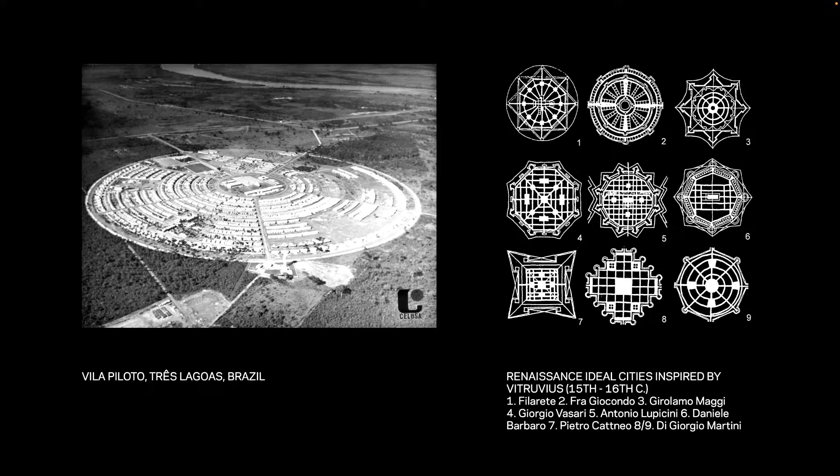Which is we're very reluctant to think about utopian visions. They're often singular, they don't adjust, they don't accommodate. We'd much rather think of architecture as a network, an ability to accommodate different climates, different conditions, whether they're social, cultural, or environmental. Kind of an architecture that, in effect, is much more elastic. So that, I think, was a provocation.

After talking about this for a number of years, we were challenged by some of our colleagues to go ahead and make a book, which in itself is probably harder than making a building. So we'll only do that every once in a while. But that also brought into sharp focus the idea that there are precedents, case studies that are multidisciplinary that address social, cultural, and environmental issues that for us have been touchstones.

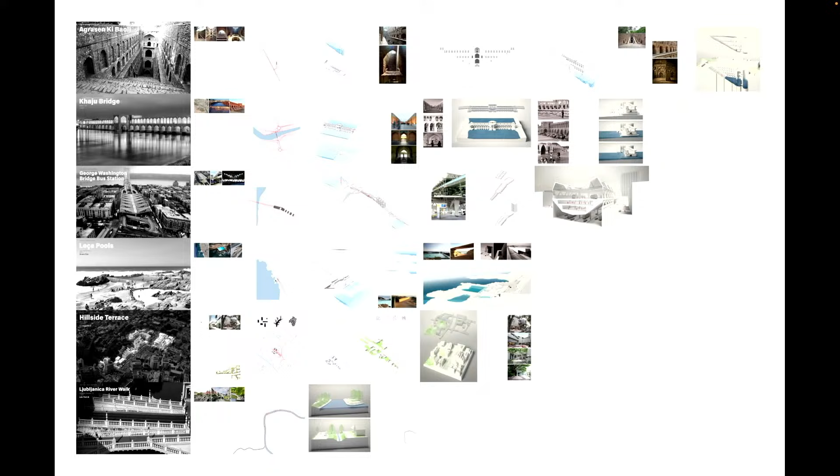Instrumental in providing a level of inspiration. So we did a kind of catalog of projects that fit in this in-between world of architecture, infrastructure, and landscape, and thought that we would really take a much deeper dive.

So we're not going to go through the whole book. It's available out in the lobby, but I think we wanted to use this as a way of thinking about how we can find a sort of intellectual mentorship through looking at other projects like Indian stepwells, which are extraordinary pieces of architecture, but operate both socially and infrastructurally. And they have great lessons about climate to teach us.

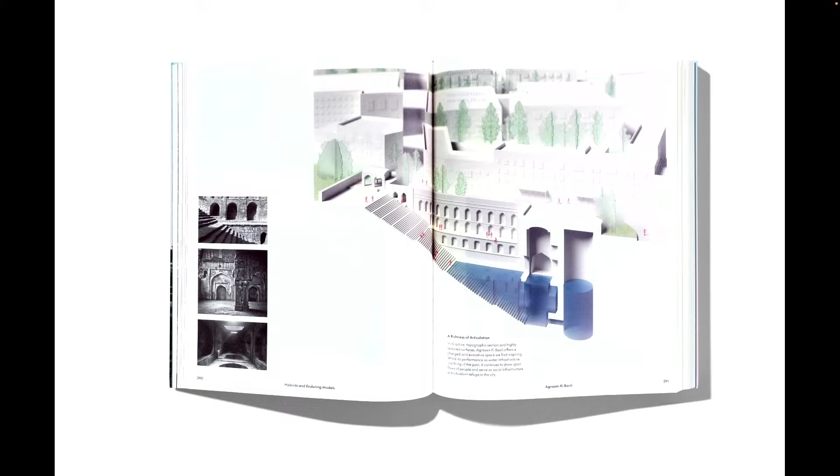So we did, I think, a very robust idea of documenting these in our office as, in a way, an homage to, and perhaps an act of love toward what great architecture can do. And what great architecture can do is it endures in ways that change over time.

And so for us, we've had a massive crush on the Spanish Steps. Michael grew up in Rome and had a chance to experience the fact that it's a social condenser as it operates to create this sectional urban space and place of movement that is incredibly inefficient and beautiful because of its inefficiency. As we started to build these models in our office and unpack them, it was so interesting to look at both the figure of the steps and the figure that it opens to of the plaza below.

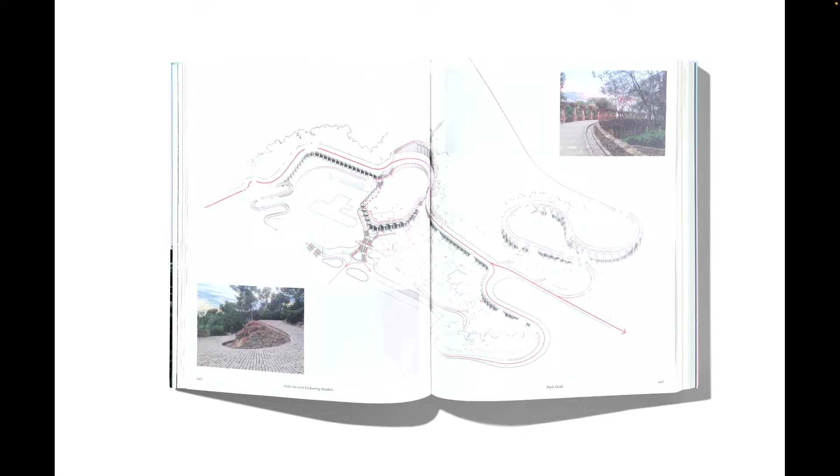And again, as we start to think about reaching out and sprawling a little further to do something incredible, certainly Gaudi's Park Güell is an icon for us. It begins with symmetry, but drifts out to have this infrastructural narrative that becomes rough-hewn in the very way it's made. But as you look at it, it does something that nobody seems to know about, which is at the very top, these columns collect water, and as they collect water into this market-style space, it's actually organized into a cistern. So in many ways, it was preternaturally aware of environmental systems that we are taking very seriously now.

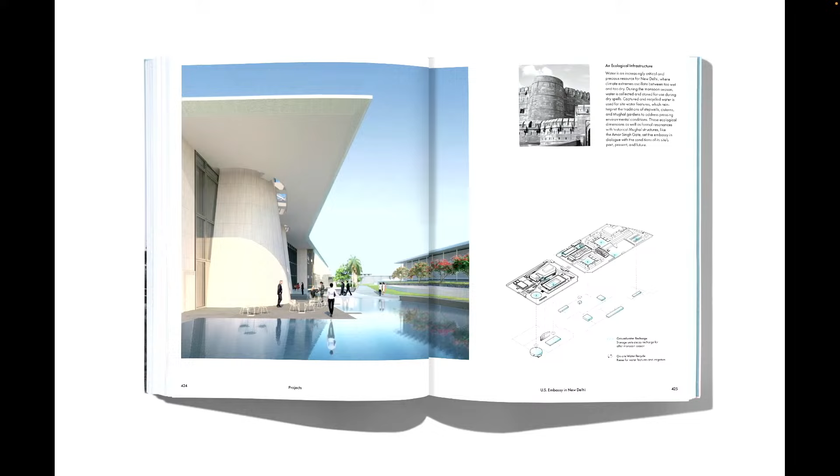We'll share our project for the US Embassy in India. But in that case, you'll see that this narrative of water and of layers and of systems and shade we have really experienced the value of, here today especially, are elements that are enduring as well.

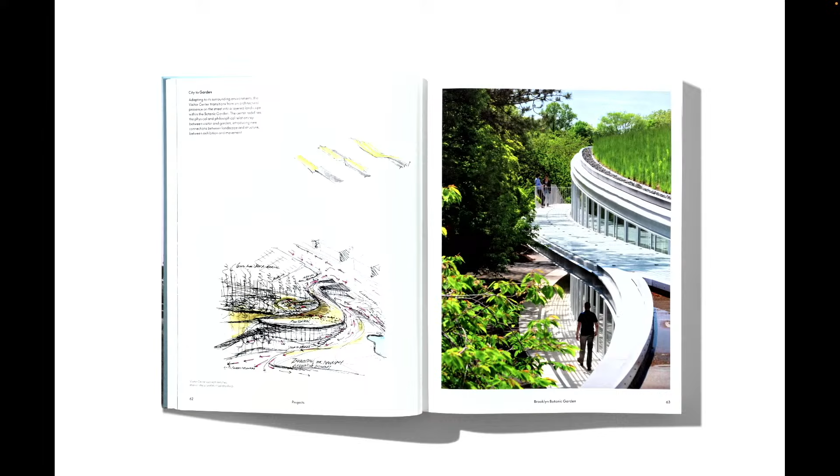And we'll also talk about the Olympic Sculpture Park, of literally constructing sites that may not be there rather than reacting, actually inventing. And again, we'll talk about the Brooklyn Botanic Garden, but again, this whole idea of topography and inhabiting topographies and delaying that sense of arrival to actually experiencing something far more amazing. We'll be able to reveal things by our super aggressive, scratchy, thinking-out-loud drawings to some of the ones that are more precise and more delicate.

We also thought we'd show a few projects that are very current, but also share some projects that have been around for a while, because we often forget that projects have a life beyond opening day.

Some of you might know this project. This is the visitor center for the Brooklyn Botanic Garden, a 52-acre tiny botanic garden in the middle of New York City, an incredible oasis.

This is what the entry used to be. You'd have to queue up and go through this narrow slot. We thought, rather than think of it purely as a building, let's think of it as a gradient between city and garden.

These little origami studies take that idea and start to spatialize it, or at least construct it in ways that might give us cues as to how architecture should operate.

The building is overtly architectural as it fronts Washington Avenue, a very important street in Brooklyn, and then slides or slaloms into the garden and becomes more overtly a piece of landscape.

We'll talk a little about architecture's capacity to reinvent movement, which is one of the things architecture can do that the other arts can't do in the same way.

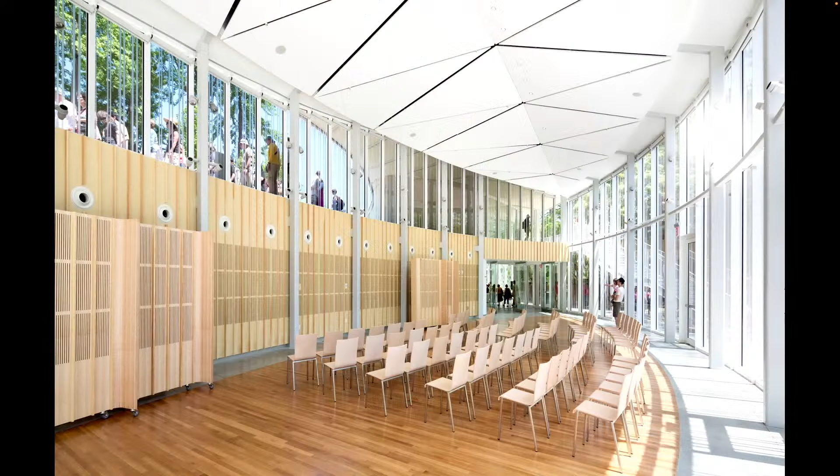There are moments where this becomes a kind of community room, a two-sided room, which we thought would be an interesting way of exploring the geometries of this particular building. At night, or even in December, it becomes a kind of lantern.

As Michael described, there are some very interesting things obvious when you look at it, which is there's a green roof. But there are many agendas here in terms of the garden's commitment to sustainability and demonstrating it.

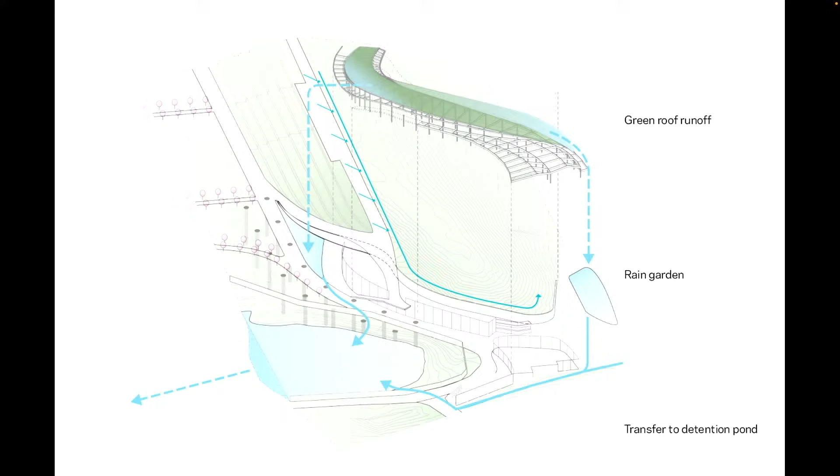The green roof collects the water runoff. We have a series of rain gardens. We have a distributed geothermal set of wells. So every element of water is harvested and somehow brought to the irrigation of both our 10,000 square foot green roof, part of the exhibition if you will, and to the garden itself.

We love this image because it's basically saying that you can be 100% landscape and 100% architecture all at once, giving you an abstraction of what 200% might be.

Yet there are times where as much as we like form, and we'll chase it down to the end of the world, every now and again we like our architecture to disappear. It does so here within the garden at that moment where it's fully embedded within this 20-foot hillside.

In that lifting or lofting, you can actually see the whole idea of the topography being inhabited and peeled open, and what Michael shared as that event space you can see again here on the oblique. We were hoping to be completely urban and architectural at the urban edge, but become 100% natural at the other edge.

However, the site that had originally been planned, which was dead center in the garden, which we suggested should be moved to the city edge, remained a remnant. So we worked together with the garden to get a grant to basically keep them from the lawsuit that was lurking on the edges for ADA accessibility. This had been what had been proposed to make this accessible and skip the whole discussion.

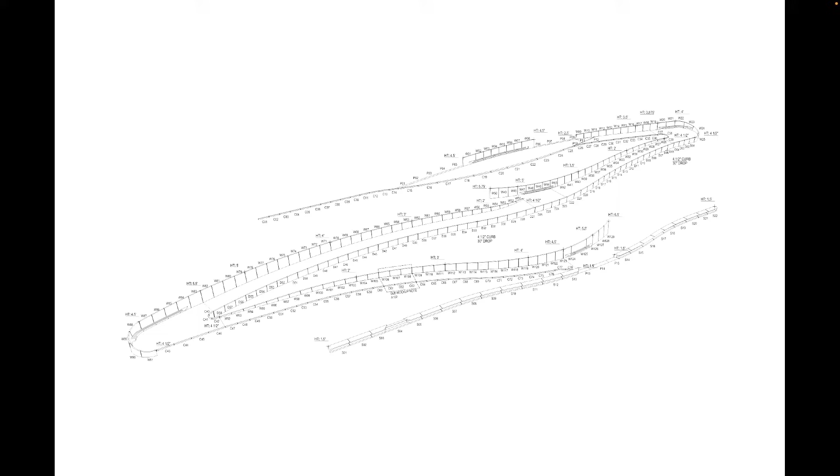Our question was, well, maybe this could become a new garden. And over 1,200 linear feet, we could actually create something that would be a journey or a new garden from the subway and actually allow both ends to connect. By using mass customization of these precast walls, we were able to actually build and construct this site.

This was done to handle the incredibly steep runoff and washout that was happening, and also manage it now with a garden that's really like no other, with crepe myrtle groves within other natural habitats, working with Toby Jones, a horticulturalist, to get this journey to be something that felt completely natural.

You'll see in this very brief film the fact that it changes over the season, and you'll notice that the roof is entirely red. In the fall, we love that it changes colors. We love that it doesn't look like an ADA ramp at all, but looks like a journey or kind of a wandering landscape. We're thrilled that people are doing dances and actually recording space on that journey.

But mostly it's about being part of the city again, part of the garden, and saying that these are, in fact, married together. So this question of what happens when things are married together is probably what they asked for you, was the Tsai Center for Innovative Thinking at Yale University.

We were asked to do an addition to Marcel Breuer's Becton building, which you can see back there on the side. And as you look at it, this is the roof of one floor of the labs, and it's really the engineering area on campus.

We said we're not going to touch that masterpiece. We're going to do something altogether different. We, in fact, said if we could create something, since it's a place of innovative thinking, that would almost draw like a light bulb, a sense that something else is happening here.

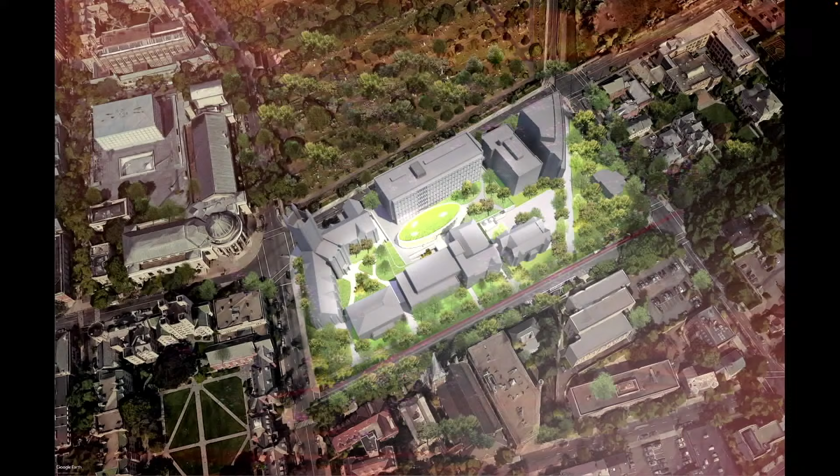We started to think about the one moment we would mess with Marcel Breuer was his barrier wall from the academic quad here by the president's office and up to the roof. If we could eliminate it and create a new landscape, we could create this new prospect for this very petite 12,000 square foot curved glass lantern, which is where collaboration and convening and entrepreneurs are gathering.

We were thrilled with the glass fabricators in China who were able to create both flatness and curvature so that we didn't need columns all the way throughout the mullions, because a 22-foot span is structurally stable with its curvature. And you can start to see that really it's a place of convening.

This is the moment when it just opened before they've really started to work it. But you can start to see that it also has a chance to be changing. These are the curtains that are actually automatically drawn when the light is strong or when they want privacy, with a clerestory at the base. Again, breakout spaces are acoustically independent but visually connected to what's happening here.

But I think the thing that we're most excited and most proud of is that the question was, how could you make the collegiate Gothic world of Yale and that brutalist world of Marcel Breuer look as if they were married?

And finally, on the left, you can see that marriage of those two languages. And of course, it is a lantern at night, and it truly has become a draw. It is really one of the most well-used spaces and one of the tiniest spaces on Yale's campus.

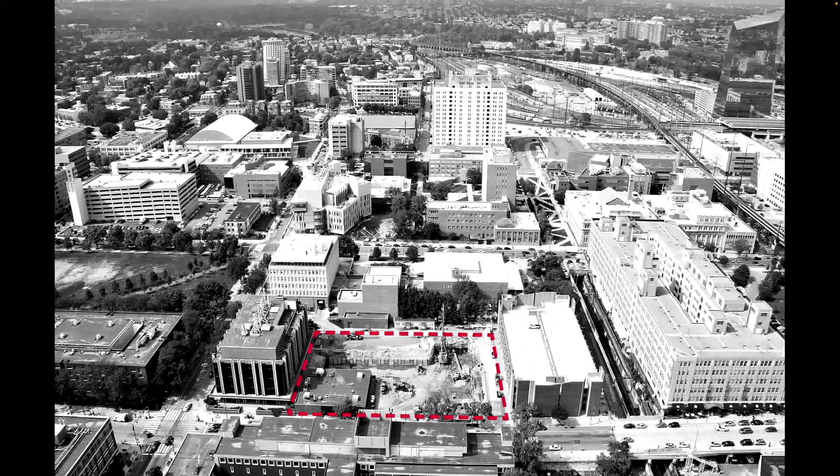So what to do? We peeled back and decided we'd take a much broader look and understand this particular site as a sort of threshold between the city of Philadelphia and the campus, that these two worlds are starting to increasingly become merged and talk to each other.

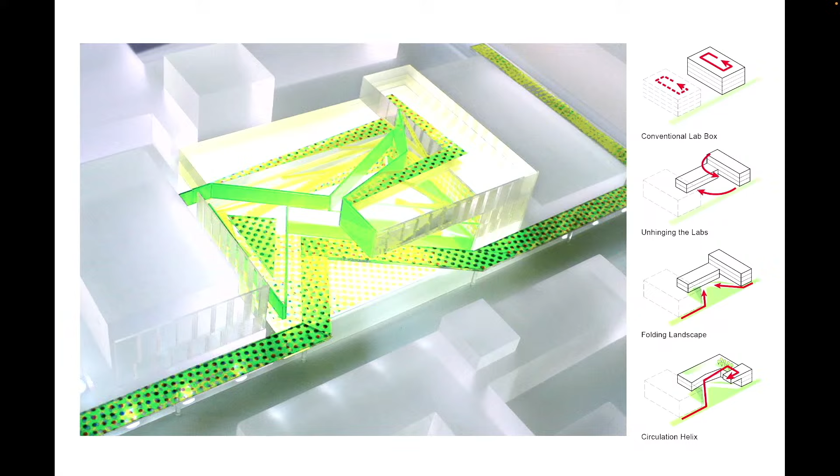We also love the syncopation of the very beautiful Penn plan for Philadelphia, a combination of open spaces and buildings. So we thought, rather than just think of this as a building, let's think of this as making a mini quad. If we could take the lab building, push it back, and wrap some of the programs in a kind of Mobius, we could create a three-dimensional quad, which is the hallmark of a traditional campus like Penn.

But it's also an opportunity to take these different worlds and think of them sectionally. It's a tight site, so how do you move through a building that avoids the problems of balkanization by floor? This was a photo taken just when the building opened, and the trees now have come into their full maturity.

And you can also see the serendipitous discovery that the dean had of finding a Tony Smith sculpture hidden away in the university archives. So I would encourage every dean we talk to to look at the university archives, because who knows, it could be an extraordinary sculpture. This green lawn is also a giant cistern, and we'll talk about the importance of managing water.

It's interesting not only because of the cantilever, but the more challenging aspects are the lateral loads. So there's a structural challenge that comes with the simple idea of making a Mobius, and like many architects, you do a quick scheme, and then you go, oh my God, how are we going to do this? In this case, we were privileged to work with an incredible engineer, Severud Associates.

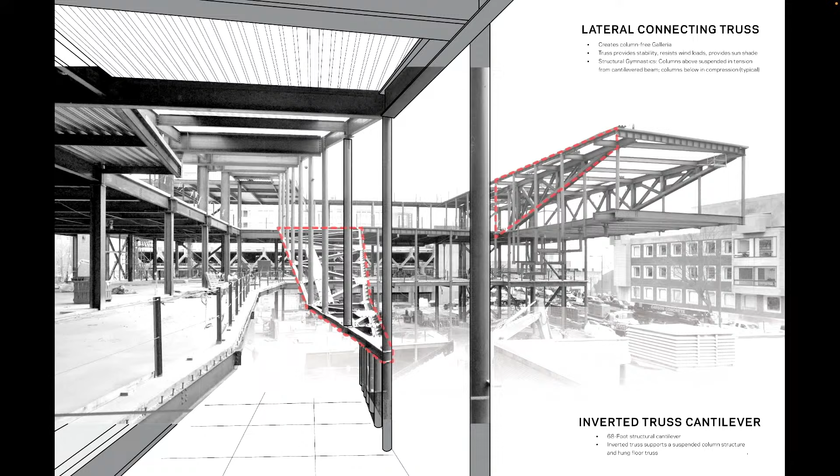You can start to see how this three-level space plays out, and how these different layers cantilever out without the necessity for columns. They're actually hung from the roof, and the lateral loads are held by this triangular diaphragm action, this kind of truss. That allowed us to create a very tall space, in effect, a porch to the building itself.

You may wonder about what's up with the yellow glass. If you've ever been in a clean room, the walls are very solid, but the doors have a yellow portal, because you need to stop the ultraviolet light, and that's what controls it. As we were visiting clean rooms with our client, we said, what's up with that? Nobody can see anything in - could the amber glass actually be comprehensively the facade of this clean room, so everybody could see in and out? Nobody had done it before, but we did research and found out that you could. So you can start to see the folks in the very clean environment are in the bunny suits.

By contrast, the microscopy characterization suites needed to be away from vibration and EMI, electromagnetic interference. So they're down on the lower level where things are most stable, but we're drawing the hillside down so they can get natural light as well.

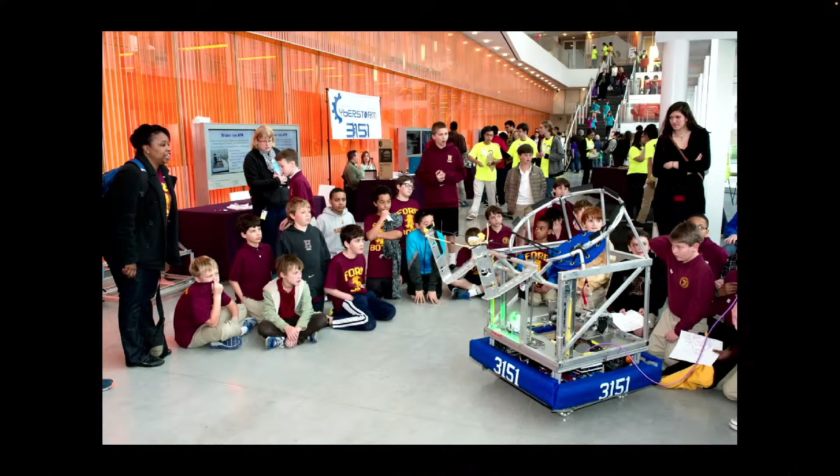But the most important thing in many ways for the university about making everything visible is that this is the most hidden part of their research. They really want to encourage and welcome the pipeline of future engineers, so they regularly host hackathons in this space to encourage this use of thinking. As Michael mentioned, this question of seeing and being seen is something that these stairs enable, allowing people to actually socialize.

Dean Eduardo Glandt had said, because the elevators have to be so remote to avoid the vibration and the electromagnetic interference, we have to make the most irresistible stair. So we did, but carefully put power there so people actually get their laptops on those intermediate landings. These are 20-foot floor to floor, effectively two stories for every floor.

But it's the whole idea of seeing what's going on and feeling like you're part of a community, including at the very, very top, the Glandt Forum, which in many ways has a chance to look out over the university and becomes an emblem of invitation as it hovers up in that origami that Michael described.

And as you start to look at it, really, in some ways it's kind of amazing at night because it changes its personality altogether and becomes an emblem of illumination within the engineering community.

So again, this is really looking at it as a building in motion. We talk about drift, but what we hope for is that the community of collaborators and scientists and engineers who are in here are more predisposed to drift and discover new things.

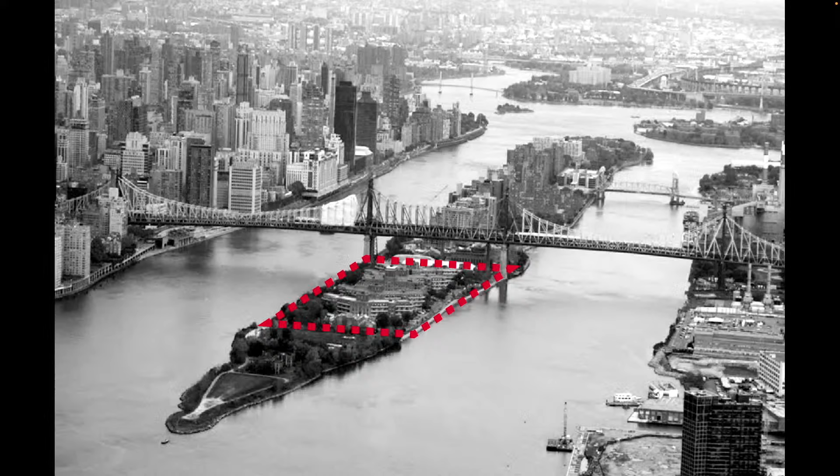So if we go to another part of engineering and science, we think about the invention of a whole university setting: Cornell Tech, the Technion in Israel, Cornell finding a place on Roosevelt Island, in effect, to really advance the connections between entrepreneurial invention and the research community.

So you can see there's a very strange thing on this island, a rather amazing island subject to flooding. You all might know about Hurricane Sandy, but with amazing views.

And when we were given the site for what is now the Tata Innovation Center, the bridge, it was really having half of it for startups and half of it for the academy.

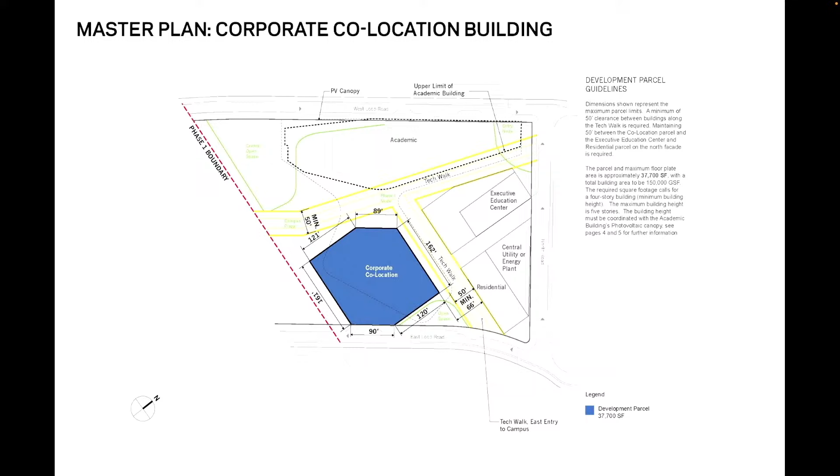They gave us this really weird site and told us to put an atrium in the middle. And we said, do you have any idea where we are? We're on Roosevelt Island. We are literally in the Île de la Cité in New York.

We could have river-to-river views, but we could also split the building in pairs so the entrepreneurs and the academics actually have a chance to convene around maybe the Spanish Steps, who knows.

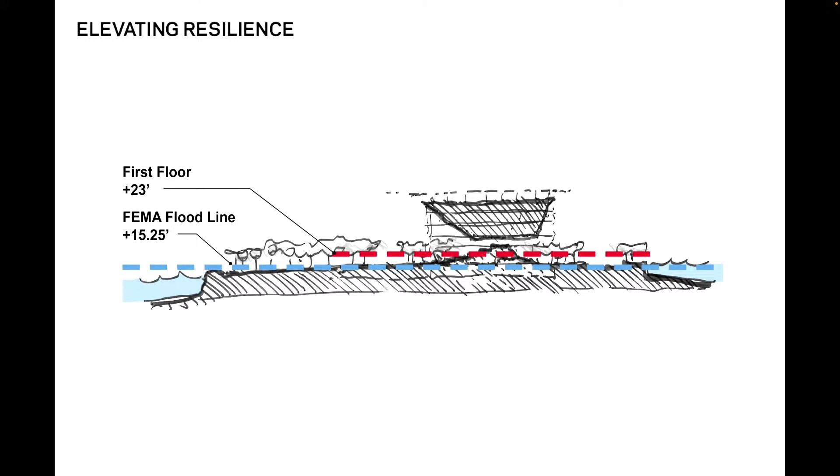But if you start to think about that, the whole idea of flood resilience meant that we raised up all the critical infrastructure, all the classrooms, brought everything up, and in effect, again, started to look at that topography of collaboration through the world's most inefficient circulation, but ideally the most efficient place to catalyze conversations.

You can see we're in dialogue with the Bloomberg Center on the right by Thom Mayne, our building there on the left, but the most important thing we did was literally elevate the corners so that rather than blocking all the views of the river and of the cities in two directions, we elevated it.

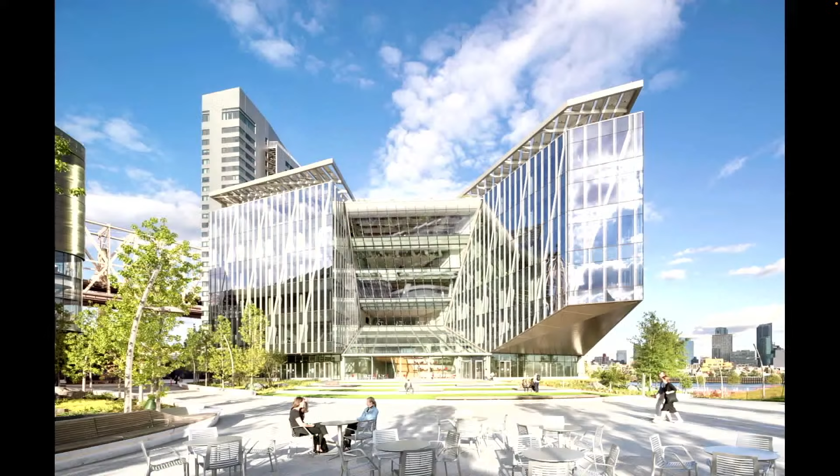And elevated it and actually split apart and made this connection with the landscape to say that we are finally open out on the central green that's been invented, and that you can actually start to understand a place of invitation. So many buildings have four corners.

We thought it actually would be great to make this much more fractal, so it actually has 8 corners, which gives, I think, in a way, natural light to what would otherwise be a very, very deep floor plate.

Marion talked about the areas of convening that are more public, and those are in the center that you see that capitalize on these extraordinary views.

But it's also an opportunity, and this is a truly public space. It's actually mandated in Cornell's charter with New York City. So it is, in a way, our homage to the Spanish Steps, a kind of place where you can, in a way, linger or move through.

And the idea of moving through a tall building, in this case it's not very tall, it's six floors, I think that kind of choreography is, I think, a lesson that is extremely important to us, a sense of a promenade or choreography. So you can move up to that kind of piano nobile that is, again, protected from rising sea levels, up through another stair.

You can enter a studio that, in turn, also is double height. And this particular corner here has become an incredibly popular spot. And you can start to see that students gather, they move furniture around in ways that we never anticipated.

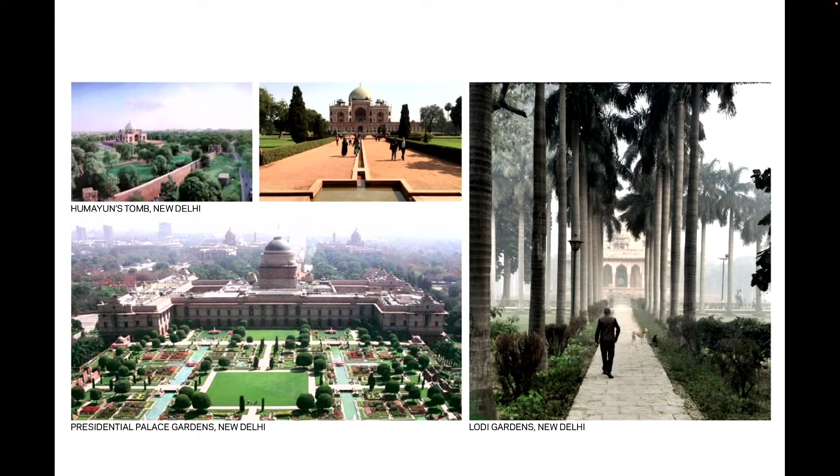And we came onto the project also very excited and inspired by the tradition of Mughal architecture and Mughal gardens, where water is treated as a very precious resource. There's a sense of balance between what's inside and outside. The geometry of the garden corresponds precisely with the geometry of the building.

Then there's also the history of using local stone to create these amazing fortifications. And we know Le Corbusier was greatly influenced in his great work at Chandigarh by the Agra Fort. If you see these giant drums, you can start to appreciate that.

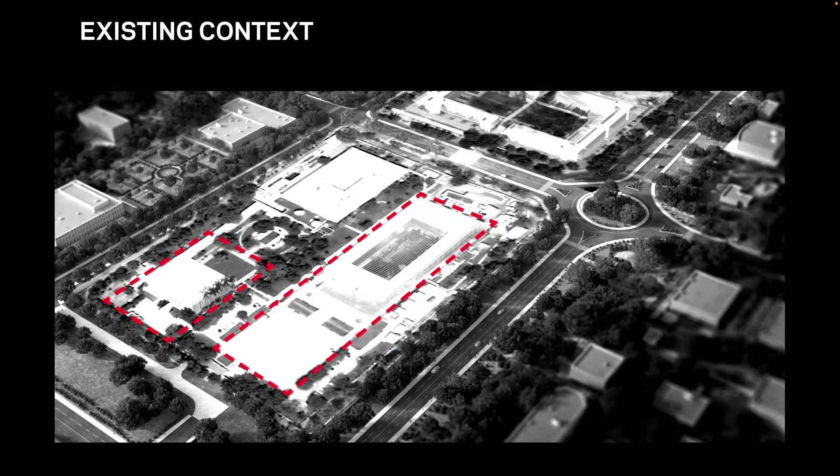So our goal was to, in a way, save and ultimately restore these 2 buildings outlined in red, the Chancery and the smaller but very beautiful Ambassador's Residence, and to reconfigure a plan for this very large embassy complex to grow over time.

So rather than think about the buildings, we thought about using a linear path to connect both new and existing buildings. It's a linear garden - the French would call this, in the Beaux-Arts tradition, a tapis vert, a green carpet that is, in a way, the driver, again thinking about the importance of Mughal architecture and gardens.

And that green carpet in turn allows us to decentralize the idea of capturing water, again building on the tradition we talked about earlier - Indian wells, which in a way anticipated how important water is.

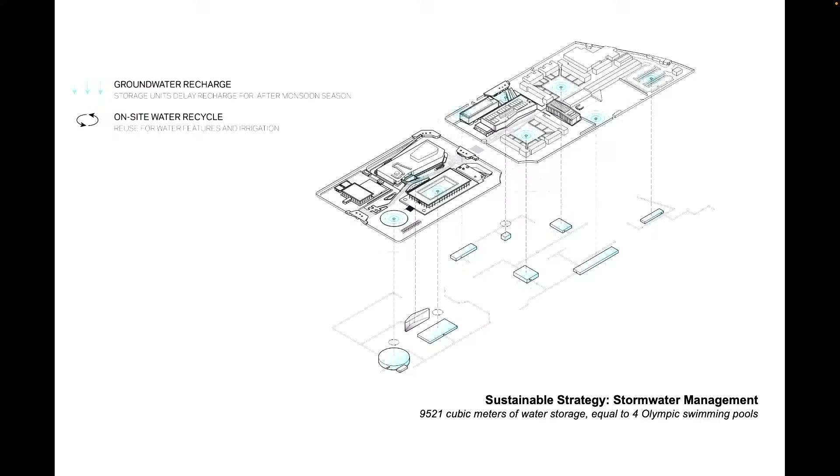So we're developing a system to capture water and keep it during the dry period. Ultimately, there'll be 2 significant buildings and a collection of smaller buildings on this site.

So we'll just go through an animation that, in a way, talks about how this project evolves conceptually - the idea of developing the promenade and connections with 2 entry gates.

The idea of then thinking about a series of sunken gardens that would allow us to put program, about 70,000 square feet of program, below grade, where it's cooler, lit through a series of courtyards and landscaped ground planes.

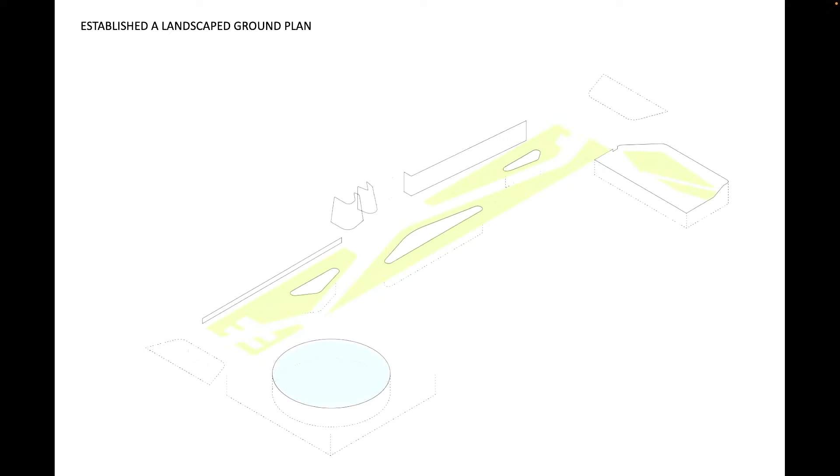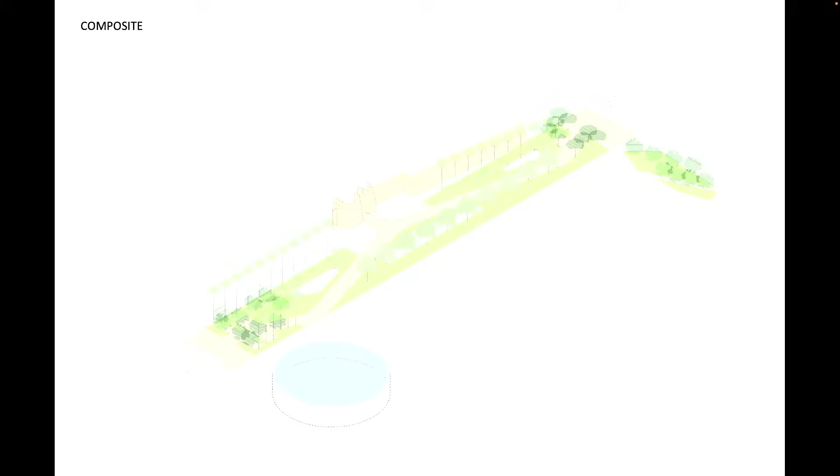And then there's a rather robust program to plant trees to provide shade, native trees. India has a number of beautiful jacaranda trees, Delonix trees. And then here you can start to see, it's a little faded, but the composite - this becomes the kind of armature against which a series of architectural elements play off.

Similarly, in India, the idea of walls moving from a very public condition to a very private condition is not pejorative - they're very important to the tradition of Indian architecture. So we want to respect that with a kind of entry area.

And then a shaded garden where you can wait and get your visas, which is a very, I think, often underappreciated, important aspect of embassies, and very stressful. So we wanted to make a very beautiful garden.

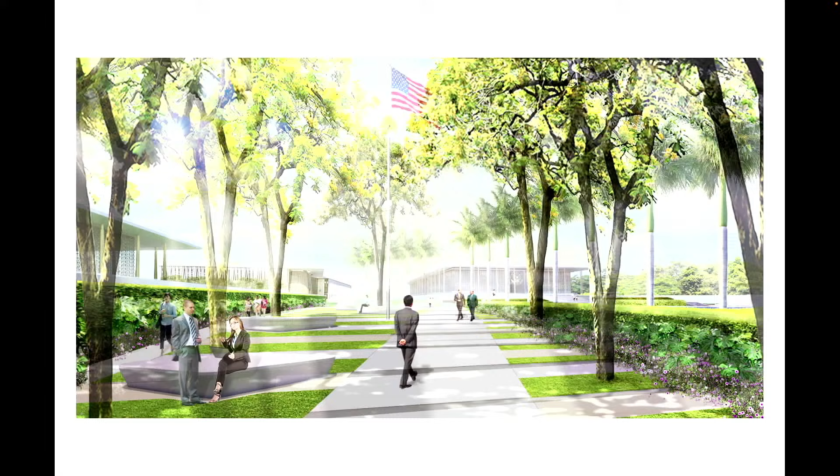That, in turn, allows us to create, you can start to see at the lower level, a series of sunken courtyards. And then that allows the complete assembly of these two buildings, the building on the right being the Edward Durell Stone building. The building on the left is our homage to that, and a new, fairly significant chancery.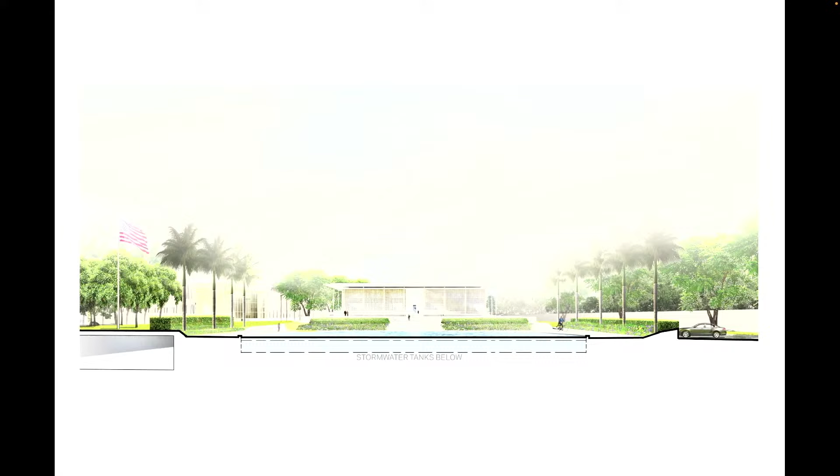In fact, under construction right now is the equivalent of an Olympic-sized pool excavation that is there on site, which will be the source for water collection.

As we come over to our building here, what we started to look at is something that you all are probably highly conscious of, which is outdoor cooling. So in addition to the shade, we have a skim of water here upon the arrival of the building that offers its own outdoor evaporative cooling environment in the shade.

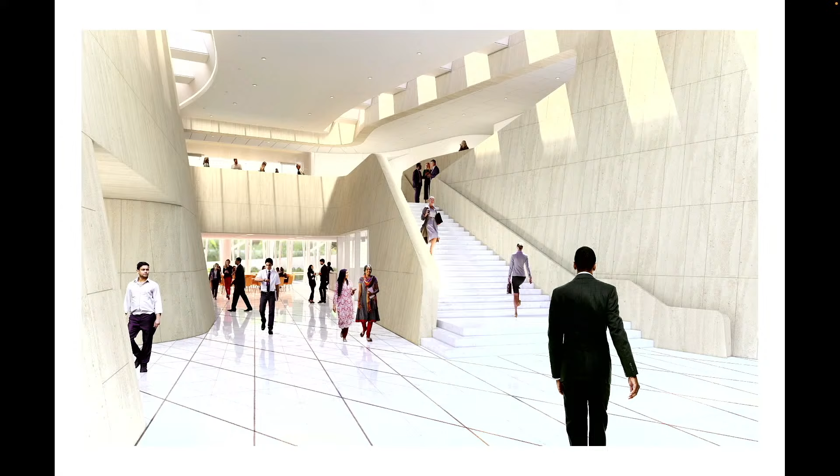And again, it brings you into this lobby here, which is really a gallery space. You can see where people gather for meals is right in the back. This is a convening area that has less security obligations than some of the interior spaces and the offices. But as we were talking about that, it's really ultimately setting up the situation where the Chancery building and our new building could be connected through these lower level courtyards and spaces.

And you can start to see the consular flow on the other side. Again, as Michael mentioned, the Delonix trees, the jacarandas, the whole ensemble of the landscape has informed every part of it. But so too is the robust influence for us, and you can see in our charcoal drawings, of these kind of drums and walls that have really been so powerful and enduring.

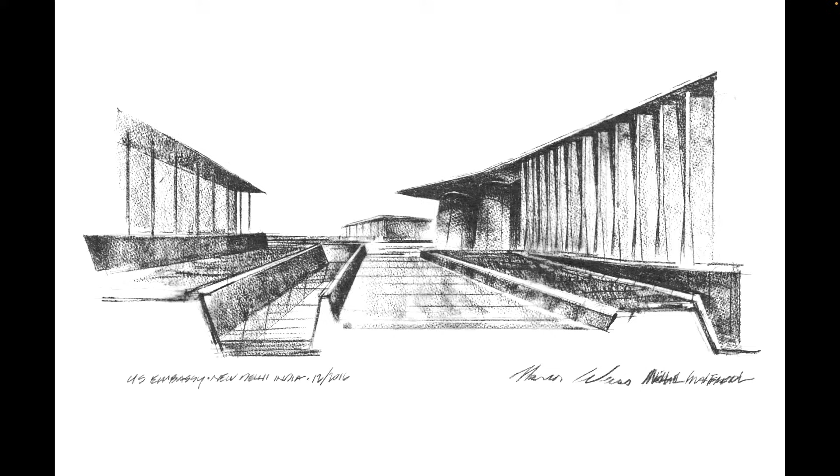So you can start to see this sketch here again with the kind of threshold. And again, also starting to think about on the left where the Durell Stone building has a jali screen of sorts that is so beautiful at screening out the sun, but you can't see out of the building. So our question was, could we actually screen the sun on the exterior and still see out?

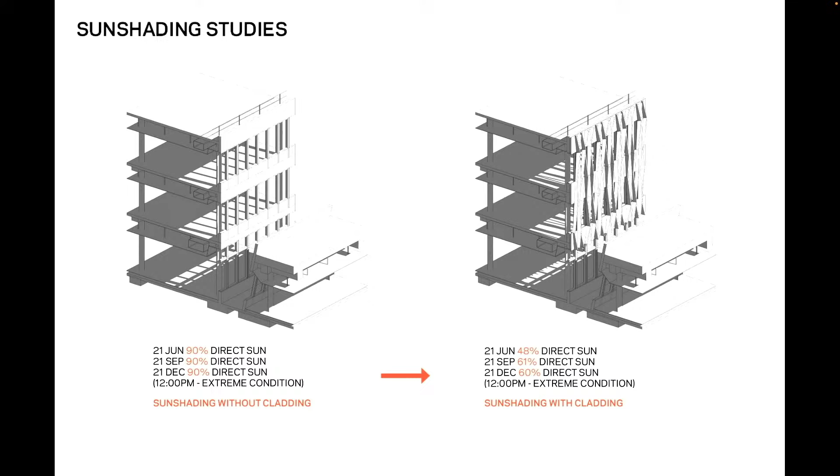And come up with a new language that somehow fuses the gift of those thin columns that are in the periphery of the pergola and the identity of that jali screen as something that might actually do more than one thing. And that led to the creation of, through our sun studies, a slightly wandering jali screen, if you will, that is able to reduce the sun significantly. And in so doing, actually, on the oblique, start to create that mineral quality of opacity, which we find so beautiful, even though it's got 100% vistas through the views.

So this is the one building. This will be completed in construction in February, very much in the thick of construction, setting up the situation to decant everybody out of the embassy space and out of the office building so this construction can begin right in the spring. And I think for us, it really is that sense of the ensemble of time, of history, of material clarity, both with the landscape and the materials here, that will actually be part of an enduring setting, we hope, for diplomacy, which has never been more important than it is right now.

So again, if we start to think about what does diplomacy look like with nature, what does it look like with art, what does it look like with urbanism, the Olympic Sculpture Park became, in many ways, an incredible opportunity to have the improbability of a failing site, fully contaminated, 40-foot grade change, a failing seawall, train tracks, a federal trucking route, identified by the Olympic Sculpture Park Committee, the museum, the Seattle Art Museum, to say, why don't we do an open sculpture park that's free and open to the public?

They didn't quite know what to do, so they opened up an invitation to artists and landscape architects and effectively said, we're not sure what to do, but we have a hunch we want to be here. What we did was, basically, if you could take a 200,000 cubic yard earthwork and actually create a form of land art in and of itself that could wander across the highway and train tracks and somehow even rebuild that seawall, we could begin to have a Kunsthal that convenes and an incredible sculpture park.

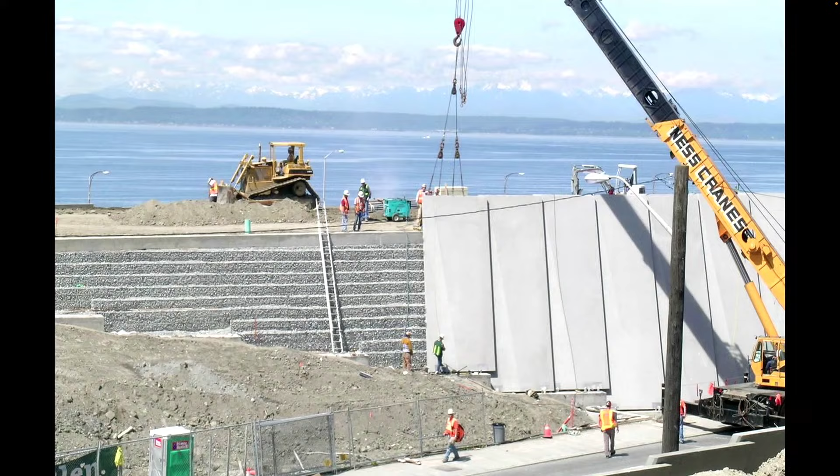We were exactly at the early concept schematic phase, 100% over budget because our walls were so expensive. We wanted beautifully formed in-place walls. And so we thought, oh my God, they were so important. Those walls are so important.

And all of a sudden, though, we're looking around with our engineers and said, you know, highway construction's not so bad. We can use mechanically stabilized earth, which you can see in those stacked gabion baskets. And then we were able to actually create these overlapping precast concrete walls from Canada that would overlap because of the seismic movement needed to be accommodated, but also go just 42 inches above the ground plane, so we didn't need any extra handrails.

So in a sense, it's like all these things all at once. You can see the 200,000 cubic yards of earth. Again, we were over budget once again. Thank goodness the museum was doing expansion downtown. They had to dig a big hole, and we got all this dirt for free.

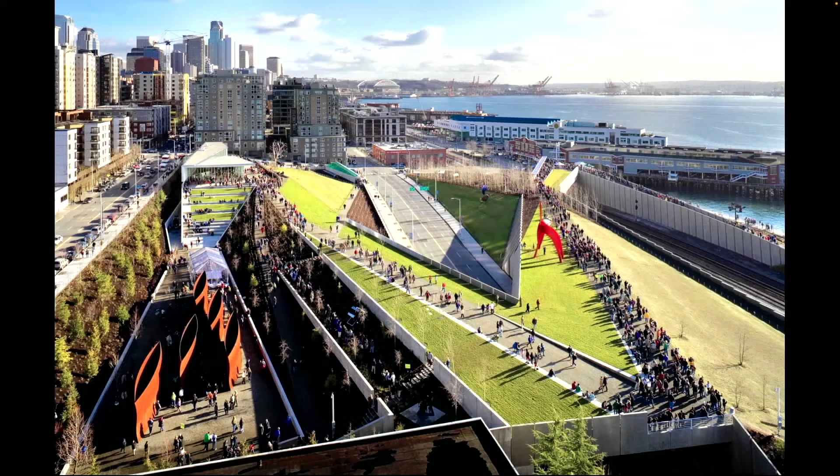So again, you got to think about all these things all at once, but the all-at-once factor really was about bringing everybody together, creating a topography where Richard Serra's piece Wake could never look better. But even taking the question of what it means to bring 10 flatbed trucks to get the steel over here, with Richard Serra being the only person in the world who could demand a 15-foot radius around where he thought the foundation might be, just in case he changed his mind when the cranes were dropping things in place.

Love to have that. But the idea was that it could be both sublime and also a place where you might want to wander, a place where you could actually start to see the way the site was constructed and unfolded, happening once again at the micro scale here for the architecture to unfold.

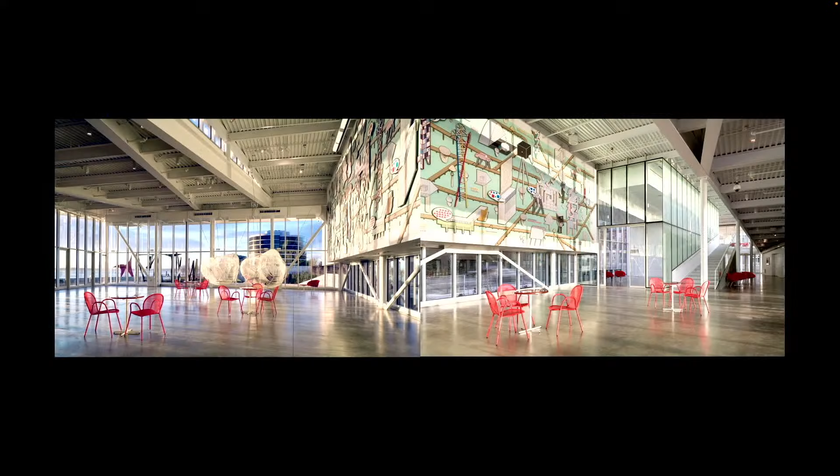So a 70-car garage could be accommodated as well as a Kunsthal inside. And here you can see Pedro Reyes's piece, the mural, and the Capulas there being the debut piece of the art to sort of say this is going to change and will always change. But it's changing in the setting of an ever-changing landscape, which is 100% artificial to feel 100% natural.

And so too is the convening that topography offers, ending up being a place of gathering, with yoga classes and all kinds of things happening that nobody knew, but have been scripted in new ways. This was a case of being called the Olympic Sculpture Park because of the Olympic mountains across the way. And emblematically, one of the most important things was that everything needed to have a chance to have views in every different direction, bringing you to, in this case, the construction over the highway.

Just a footnote, Mary and I do many drawings and encourage folks in our office to do drawings. We also believe design has to operate with a very large toolbox—films, animations, digital models. We teach at a school of architecture, and we encourage everyone, including ourselves, to operate with as many tools simultaneously. Otherwise you tend to fall in love with the tool you're most comfortable with, which is always dangerous.

We're now exactly over Elliott, a 4-lane highway, and the idea is that the highway completely disappears. We've since come back—this is a great place where selfies are taken. That grass had been completely trampled over, so we introduced a stone walkway so you can still take selfies in a way that becomes part of the magic of this site. You can start to see how that's taking shape.

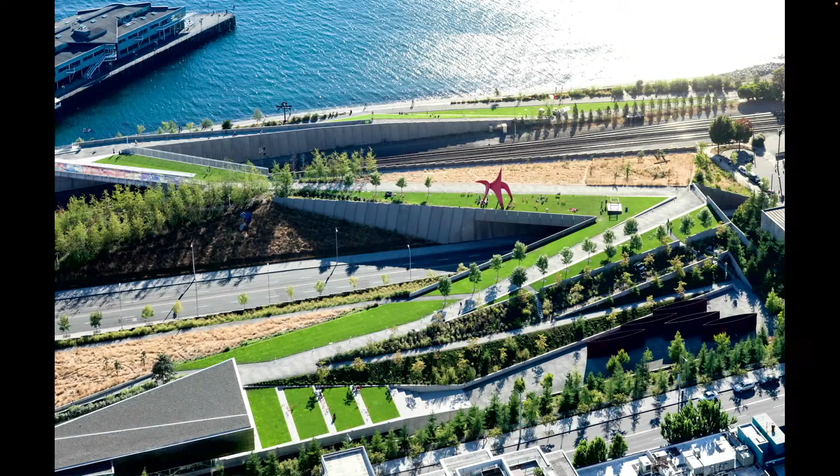This photo by Iwan Baan was taken about 5 years after the park first opened. You can start to see the trees taking on a level of maturity, asserting themselves, and at times the grass changes color—at the end of spring some grasses start to turn brown. The sense of architecture molting and changing its characteristics is something we try to achieve in this project and in others.

At times we love the idea that you could slide under the highway and maybe never care about art, but know that there's something special happening up above.

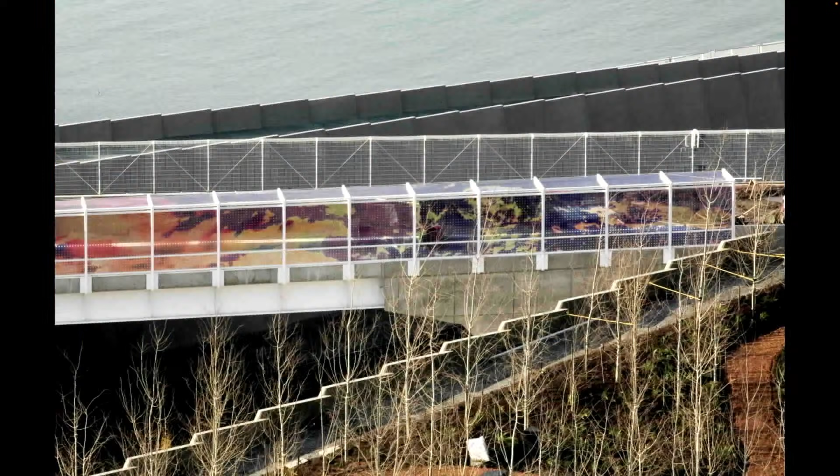At times we love the idea—this was actually Richard Serra's comment to us—that the trains become the most extraordinary mobiles. The sense of this train moving up from Los Angeles to Vancouver becomes a moment where the train spotting community, relatively silent during the project's development, suddenly became one of the great constituents and supporters of this project. It becomes a kind of performance, the train. There's a very beautiful glass fence by our friend, the artist Teresita Fernandez. That sense of reciprocity between the architecture, the art, and the infrastructure gives another dimension to what we see and how we establish a sense of place.

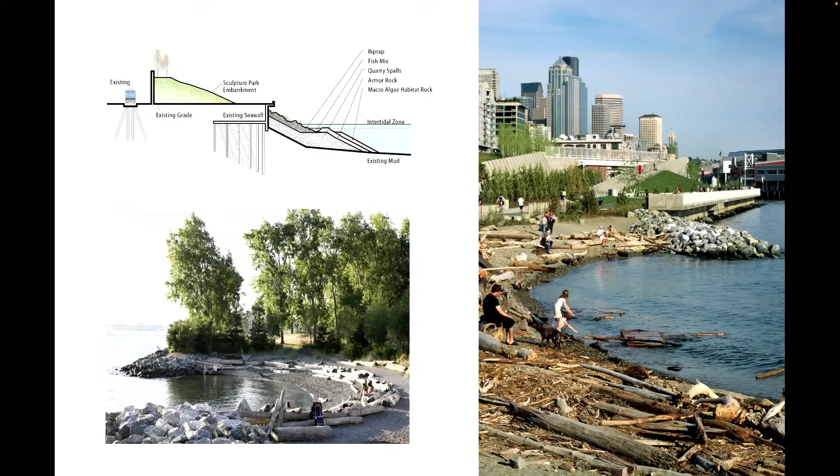This beach was actually highly engineered. We had several hydrologists talking about how to reclaim salmon habitat, an opportunity most architects don't have a chance to think about—what is the subsurface or aqueous condition of these terraces for salmon habitat. You could see the engineering drawings developed from biological studies of salmon habitat. We've gone back, and it's been a little over 10 years since the park opened, and that salmon habitat is now flourishing. That's one of those other aspects we tend not to think about—a sense of how architecture can engage a larger environment.

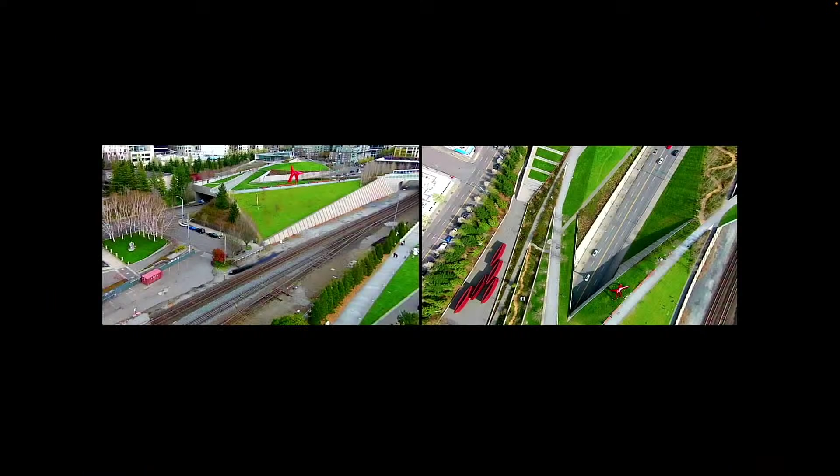Let's do a little film that really talks about the sound. We are living in an incredibly visual world and forget the importance of sound in architecture.

Spencer Finch, by the way. So there are new art pieces every 6 months.

This is the cutest little girl.

So the sound of trains becomes part of the architectural experience.

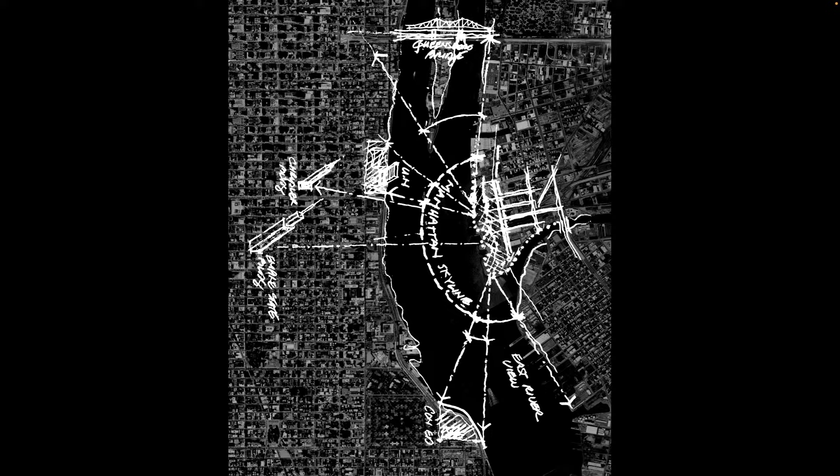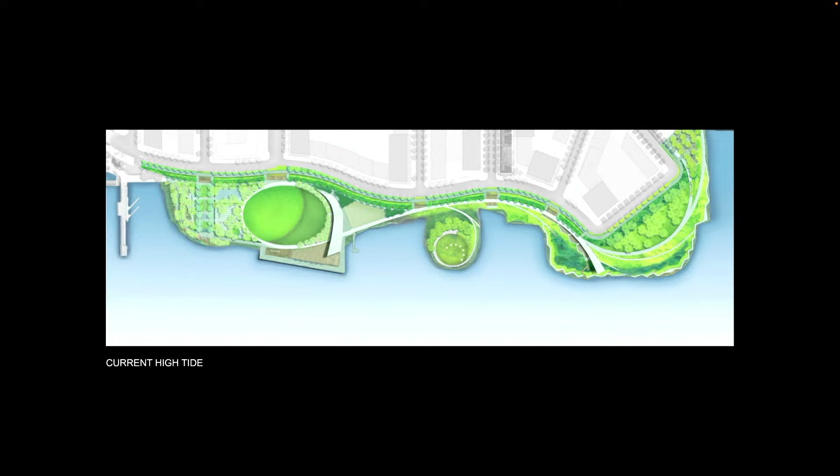Mayor Bloomberg's initiative was to reclaim this to spur development of affordable housing. Often in New York, public spaces come after development. Here, actually, it's a brilliant idea to generate value. But we also love the very idiosyncratic edge condition, which allowed us to create a series of different events, so the park becomes a series of events rather than a singular experience.

We also began, after talking to a number of hydrologists, playing with the idea that the waterfront could be kind of a sponge. This wasn't our idea originally, it had been around a long time, but it was radical in terms of the New York City Parks Department. The idea that flooding could be seen as an interesting way of dealing with what we're all going to deal with soon was also a rather radical proposition.

So the green oval actually is a giant cistern. Hurricane Sandy came about the same time that the park opened. We were able to absorb the water and then slowly release it, because with hurricanes and flooding, it's never the water that's coming in, but it's always the water that's rushing back out. This gave us an opportunity, in a way, to do a full-scale prototype. Now New York City Parks Department is using this as a model.

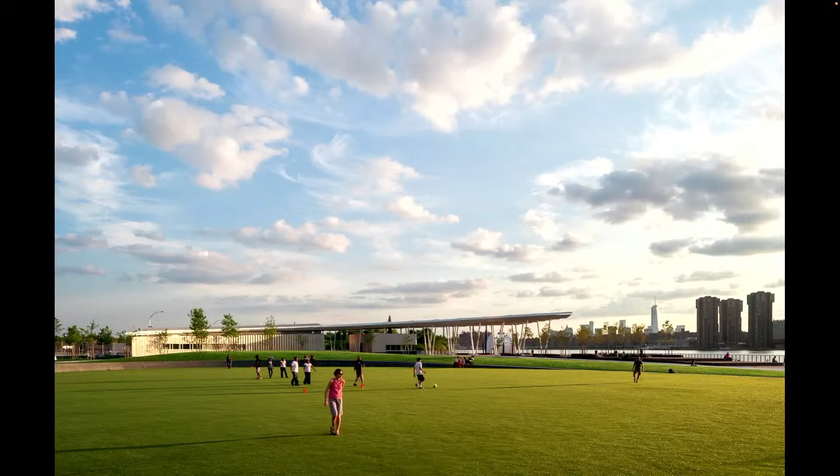So there are different events - there are playgrounds and this large soccer field here, which is very heavily used as the housing is now developed. You can start to see the kind of piping underneath, which are sort of giant trench drains that gather the water, and then through a series of locks and dams, quite small on the far right, that water is then released.

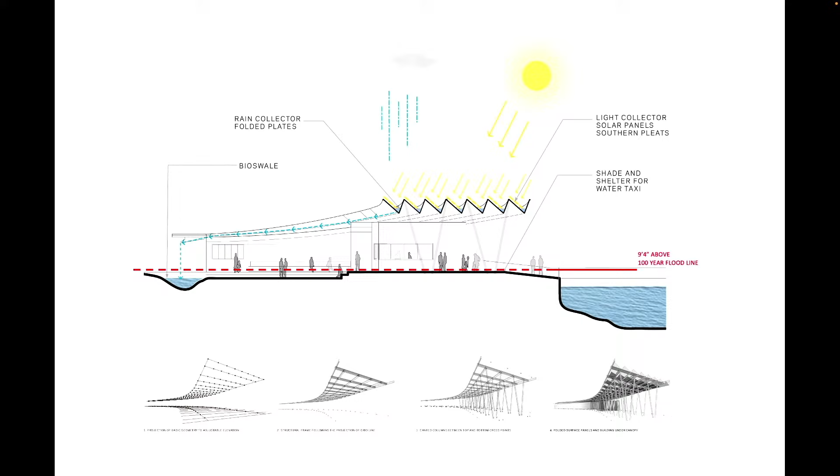The pavilion you see here, like Marion described with the Brooklyn Botanic Garden, is, in a way, not only a piece of architecture, but also a piece of infrastructure. So we can capture water in the valleys of the folds. The south-facing parts of the roof allow the park itself to be net neutral in terms of energy consumption. But we also love the shape - it has a sense that it is nautical, but also provides much needed shade.

We were also able to reintroduce some of the plantings that might have been prolific in this particular area - in this case, Rugosa roses or shore pines that love sand and love wet conditions as well.

You can start to see how we're thinking of the architecture as an opportunity to frame a view. I think it's been said by many that often views don't exist until you frame them. So the sense of framing a view in this case - we're exactly on axis with the Empire State Building, very precisely calibrated. We think of this as a kind of clock that talks about the changing quality of light, enhancing or perhaps celebrating that sense of change over time.

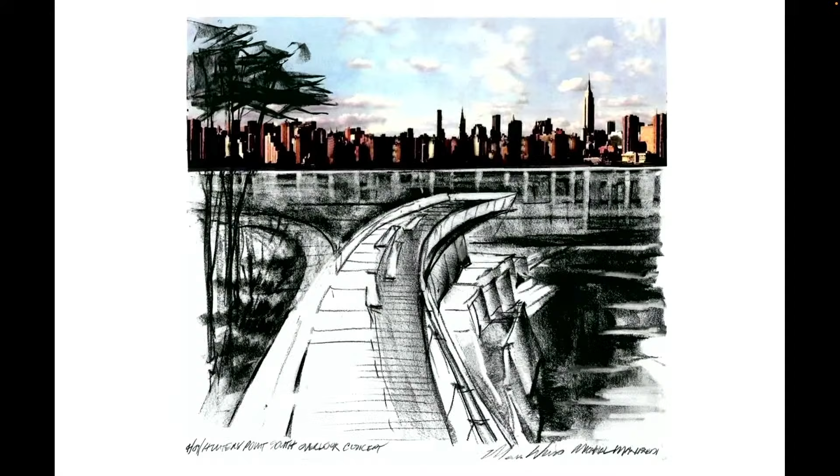So, change over time - this was completed, and then funding, of course, paused. The whole of the park that you saw in those diagrams Michael was sharing couldn't be done until later, so phase 2 came a bit later. What was amazing is that this was probably one of the lowest points in all of Queens, but this strange ragged edge was very inspiring for us, which led us to ask, could we actually have a 2-level park?

Could part of it be something almost heroically inspired by the industrial exchange and shipping there, or could some of it feel as if we're at the water's edge? We did these drawings as a way of thinking out loud about these possibilities, and started to think about a structure that would allow walking down to the water's edge, working with shipbuilders, in this case in Maine, to fabricate something that could be brought on site and ultimately drop down to become this kind of dual focus - talking about the both and within this image.

So we have a chance to have that fortified edge there, which you can see is not unlike the medieval fortifications that Michael was showing at the very beginning of the lecture. But we're actually able to create a new wetland, and this is filled with water twice a day because of the tidal change, and then becomes emptied.

You can start to see some of the things we learned on Seattle with seismic resilience being embedded in the way the concrete is made. In other cases, we recognized we have an entirely new artifice, an artificial recreation of a wetlands that was there about 200 years ago.

That prow of the ship there was inspired, if any of you have been on the West Side Highway and seen the Intrepid. We were so taken with that possibility of the both and. A part here is an island when the tide is high and a peninsula when it's low.

You can start to see now that it changes seasonally with these incredible gum trees, but you're here and you have no sense of being part of the city, yet you're able to see the prospect of it. You can make your way out onto the very edge and feel like you're literally over the edge of the river, and have that sense that you're walking on water.

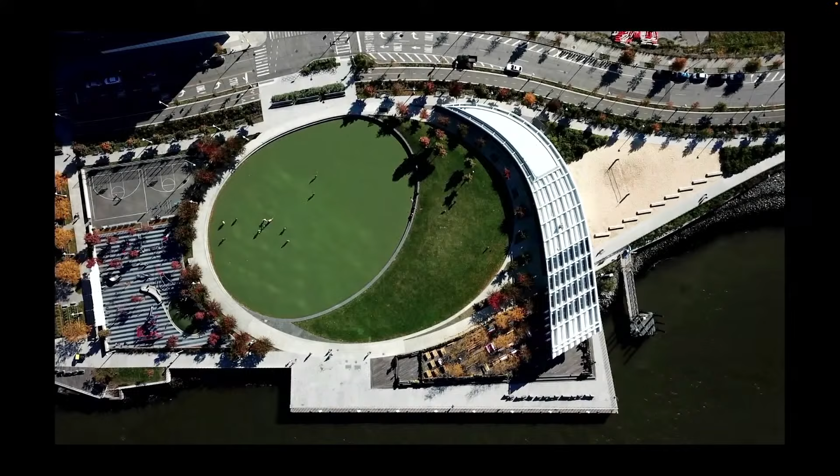In this particular film, you can start to see the solar array that's also on the pavilion, along with the water capture that Michael mentioned. It's also a place where the city has really reintroduced ferries, which are very actively used, hence the ferry waiting area and the cafe here being co-located.

It's not me, by the way.

We definitely like the fact that passive recreation has some interesting characters, and you can see it now when it has no water in it. This happens again with the twice a day rise and fall, and then ultimately the kind of seasonal exchange that you can start to see.

We'll go to Longwood Reimagined, the most recently completed work we've done. In many ways, we've been working over a decade with Longwood as an incredible steward of DuPont, Pierre DuPont's collection here, where he was trying to save these old growth trees and created a place inspired by his tours of Europe. He was very interested in conservatories where he could grow things that wouldn't thrive in the winter, and at a certain point welcome guests.

Now you can see as it historically started to welcome guests, it had some quirks about it. Over time, a series of production greenhouses and parking were closest to where we are on the lower part of the screen, and then the fancy conservatory was on the other side. They had a huge fountain garden.

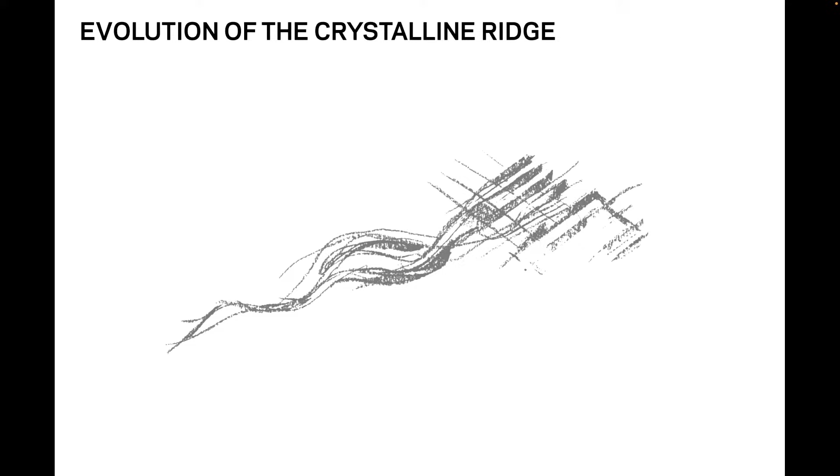But in some ways, when we were invited to think about a new conservatory to really bring something forward, we started to think about the topography and the pleating of these conservatories as one. You can start to see here, this just opened in November, what it means to transform an institution.

When you have a historic, elevated plinth, the kind of cathedral on the hill of the old conservatory, they had a complete earthwork retaining wall that meant you would always be seeing the fountains from above. Not a very welcoming and inspiring arrangement, but we started to think about what if we actually carved a series of vaults into the wall.

We could carve into the wall, remove the earth, and start to create places to inhabit, then extend that crystalline ridge further west, where you can see our new conservatory. It really is this ensemble of both a legacy that's 100 years old and bringing it forward into contemporary times.

That carving underneath enabled us to not do a freestanding restaurant, which was the first query - where would we put a new freestanding restaurant - but in fact carve it and hide it in plain sight.

We were very inspired by bringing that sense of the natural landscape all the way in, and these vaults which support 4 feet of soil and an alley of gum trees.

You can start to see this idea of a place that feels both welcoming, not so much underground which it truly is, but something that opens out to the garden and out to the fountains, which are so well known. We worked with the Challenge program, which trains disadvantaged youth, who are able to actually get training and work with wood.

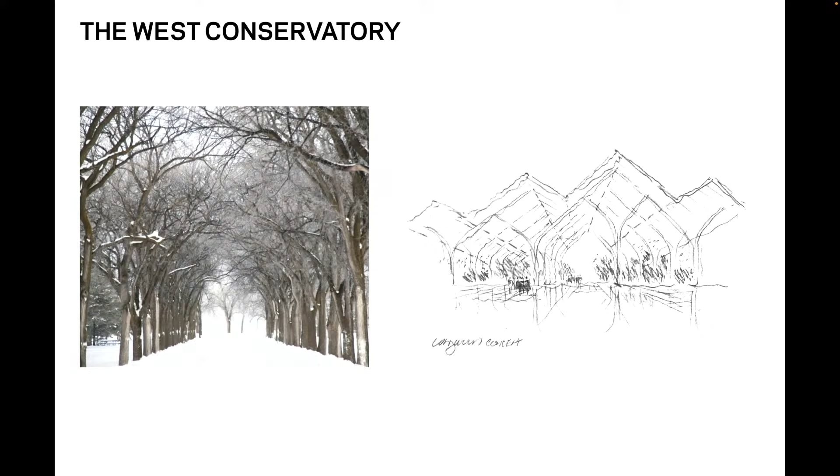We started to think about the possibility that the groves of trees we see on site, and that structure, really start to reach together to create something that in many ways is almost a grove of trees that form this cathedral-like topography.

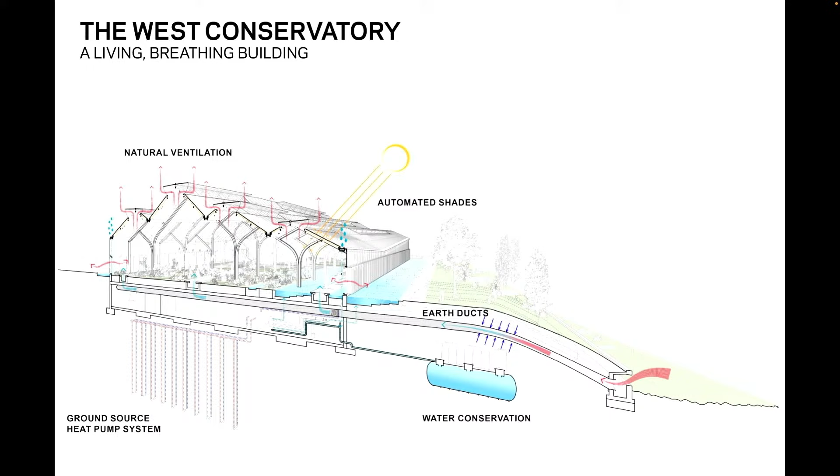It's one where the living, breathing idea we're so inspired by—the botanic life and human life and all of these things coming together—means this is a work of simultaneity with earth ducts, automated shades, natural ventilation, geothermal wells, so that it's fully sustainable. You can start to see those earth ducts and geothermal water collection tanks all in progress.

A new garden effectively in progress, and a place that really turns into this crystalline piece of magic. And it's a piece of magic that in many ways is changing just as much at sunset as it is by day. It's a place where, in fact, birds have made their way in through the roof vents, so it's not just the botanic life in there, but also new forms of life that we like to welcome.

Marion mentioned that typically glass conservatories consume an extraordinary amount of energy. So the challenge here was to use high levels of technology with sophistication, but also many simple technologies.

Geothermal systems are quite simple. Earth ducts, for example, have been around for about 1,000 years. So the idea of both high tech and low tech was an incredible opportunity.

But Marion talked about the trees. There's a grove of sycamore trees, and if you look at how sycamore trees develop, there's a very beautiful moment where the tree trunk splits and becomes a series of branches.

So we worked with Jay Taylor, a brilliant engineer, to, rather than do either a space frame or the typical column and beam condition, have the columns split and become a series of beams.

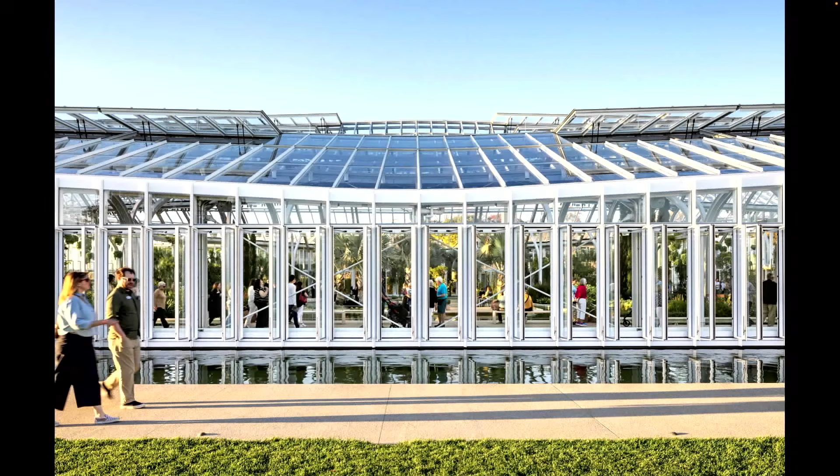But everything can start to open up on the vertical surfaces as well as the roof, so that the building literally breathes, like gills on a fish, depending on whether there's a breeze or whether the air is somewhat cool. You can start to see the interplay between the mechanics of the roof, which we didn't want to hide.

We wanted to let the frankness of the interaction between the machine and the building be very prominent and very figural, with these very beautiful, elegant, curved column-beam hybrids.

Let me go back and just show you how this starts to operate. There's a little weather station that allows the pistons to open and close. The water, which is collected off the roof, also acts as evaporative cooling.

So the roof at times dips significantly. Again, it's our homage to the beauty of the Brandywine Valley, this whole area around Longwood—it's got very soft, undulating topographic conditions.

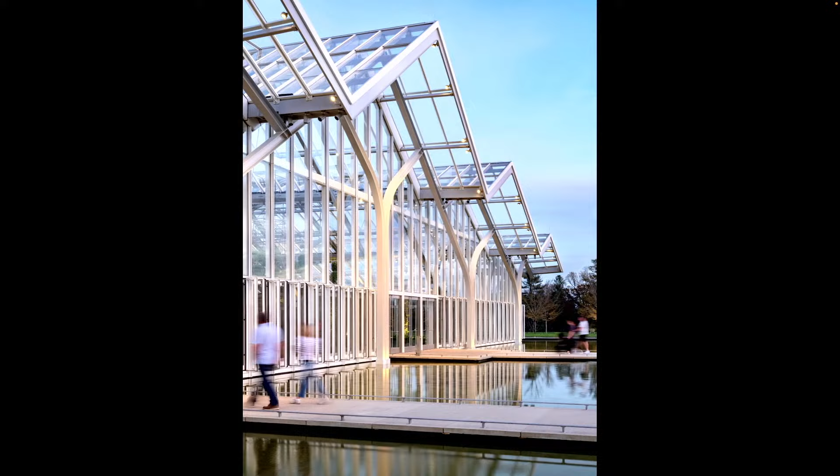At times when the sun starts to set, the building on the oblique looks almost solid. At times, you can see the interplay between the reflectivity of the collected water, which then gets used for irrigation. Over the course of the day, we love how architecture can play and enhance that shift of movement, that sense of the temporal.

So the last project we'll share, as Marion said, is the most recent. You'll have to forgive us if it's still in its nascent stage. But it's an incredibly important project for us because it brings together what it means to use architecture to help an institution invent itself, and what it means to think about architecture and landscape as reciprocal rather than antithetical.

In a way, this project started, I think, maybe a little over 10 years ago. We were invited to look at this as a cultural district, and there were a series of workshops which allowed us and many of the folks who participated to think of this as a district.

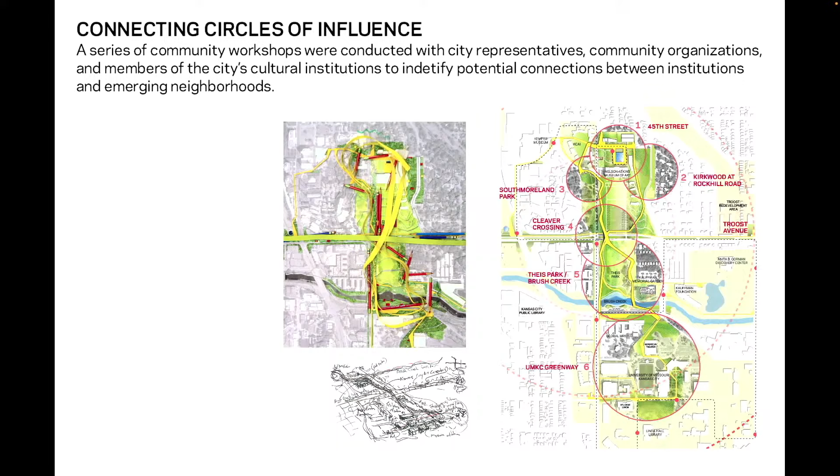You can actually see the study model with little red pencils came out of a workshop. This is an area with a number of institutions, including the Kemper Art Gallery, the university, the Nelson Atkins Museum—all very important institutions. It was maybe a sense of saying it isn't architecture that matters, but more the perception of how these different institutions could start to interact and be seen as part of a larger ensemble.

So in a way, it's a way of re-looking at a set of conditions perhaps in a fresh way, without adding architecture. You can start to see we played with the idea of saying, what if, around a series of conditions—it becomes a kind of large figure eight that allows us to think about how close these institutions actually are to each other. We're very excited because some of these elements are now starting to fall in place.

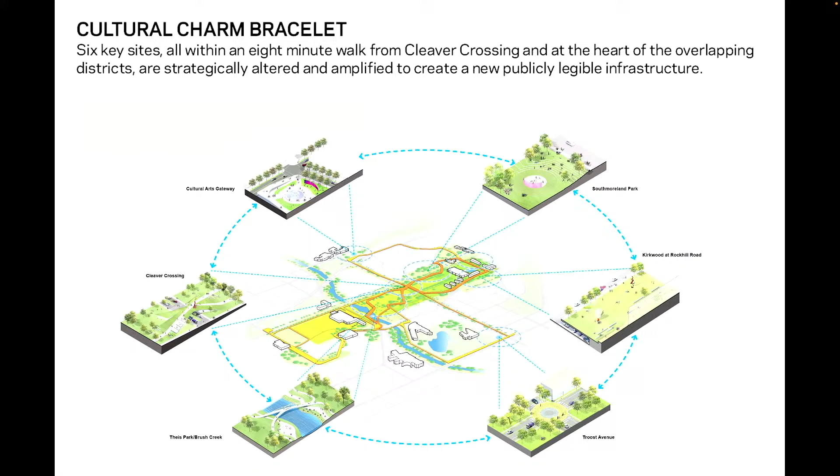There's a fantastic trolley system—a streetcar system, not trolley—that will allow for a level of interconnectivity. This resulted in a kind of visioning plan for this whole district. And Nelson Atkins, you can see, is on the upper right.

That brought us into, in a way, a number of years passed, and then there was a fantastic competition that we were excited to participate in. It was narrowed down to about 6 firms, and then we were very fortunate to have won the competition. So we're starting very much to think about this project.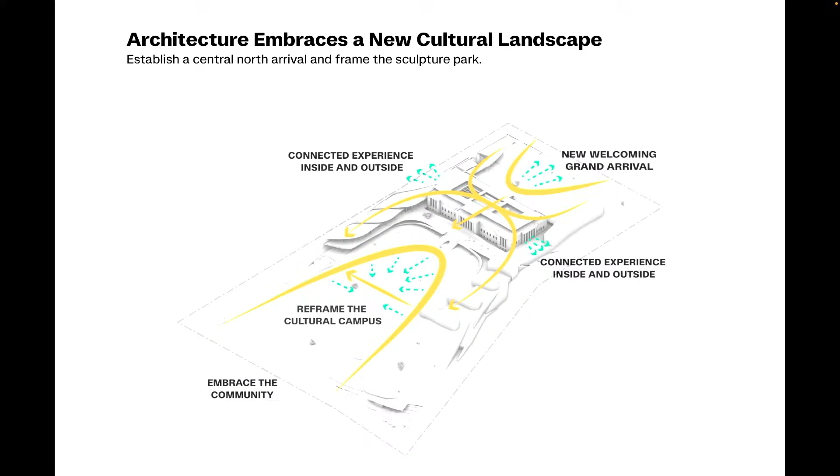Again, the kind of reciprocity between what's existing and what's new is a fantastic opportunity for us to think about how we can reframe a very beautiful garden, but also reframe the existing Nelson Atkins. Many of you know that the existing Atkins building is flanked by a very beautiful addition by Steven Holl that was done a little over 10 years ago.

But these are little sketches, and we show these because I think in some ways the precursor of the idea is often more interesting. The idea of reanimating the plinth, which is an idea we explored at Longwood, finding a way to do it in a new way here was something central to the idea.

Then adding a new wing, which you see through those three crescent shapes, would start to rebalance this very beautiful composition that had been set forward first by the Nelson Atkins Museum in the 30s, and then by the Steven Holl addition, which you see through the series of pavilions.

So if we start to think about what that means, it's that in many ways the Nelson Atkins Museum is this beautiful declaration of culture right in the heart of Kansas City. The Bloch addition brought this idea of, as it's been described, this kind of translucent addition to really extend its reach and capture one side of the landscape.

For us, it felt very natural to say that if we could balance the west side in many ways, we could bring that next chapter of transparency and engagement with the landscape, full connectivity, and recenter that sense of arrival in the middle again.

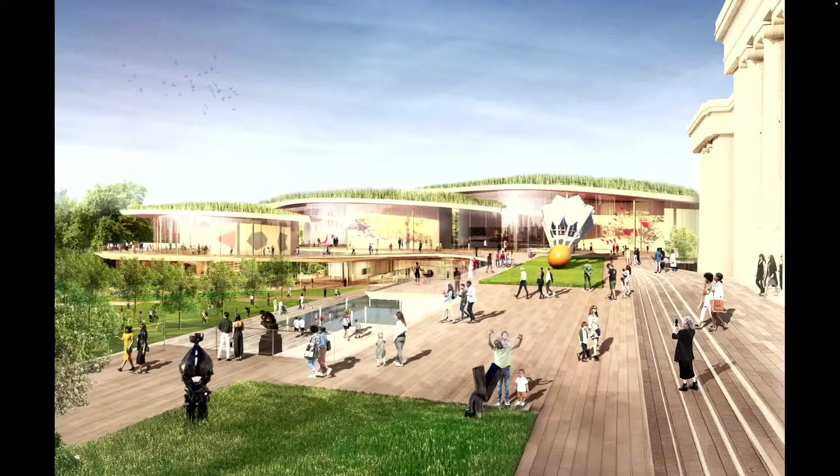Now, that sense that these things can be seen all together, all at once, is seen up here on the terrace, which overlooks the sculpture garden—sculpture park—which is so beautiful. But developing a series of leaves that could actually follow the topography down for gallery spaces is what you see here. What was hidden inside was any connection to the outside.

So by removing some of the stones selectively on axis, we could create a series of what we call art lounges, where art that can actually take natural light can also be co-located with a place of respite and incredible view—giving you a sense of where you are in a museum, where from time to time it's hard to know exactly where you are.

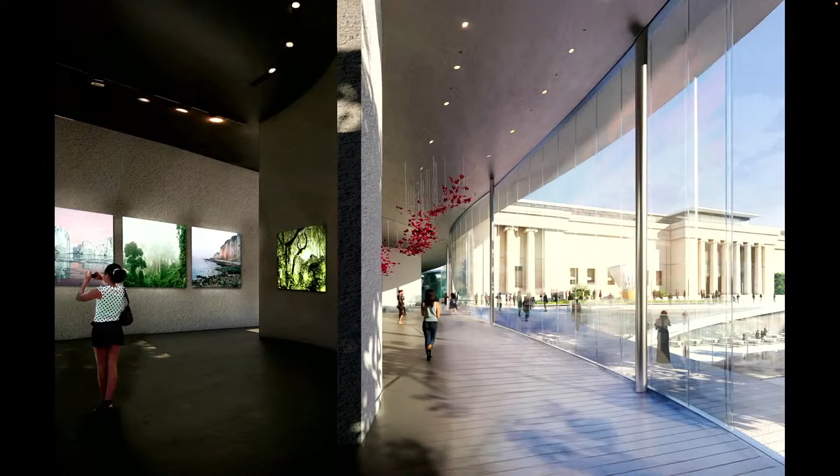And yet with the addition, that query of how can we actually have a place where you could walk on the edge and natural light could be welcome, but in other cases within the galleries themselves, full darkness might be what is truly required. So that balance of whether photography might want to be protected from light, while some sculpture might be welcoming the light, comes into focus as a promise.

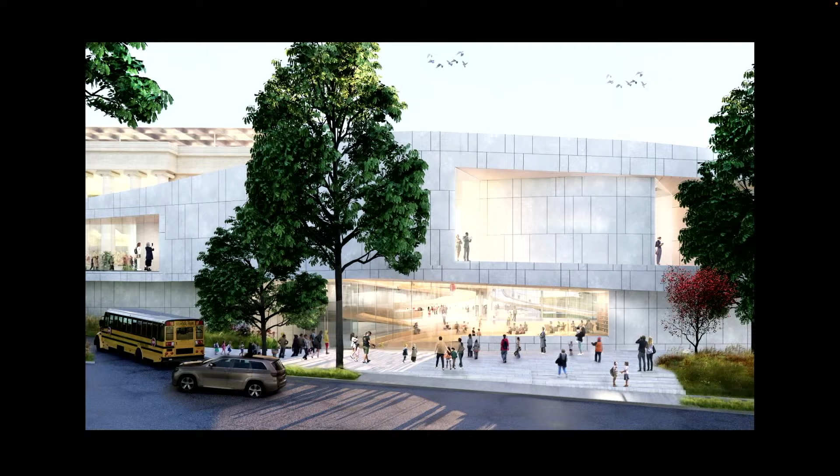As we look at the idea of what it means to arrive, in this case off of Oak Street, that new edge should not be so much of a barrier, but a place of welcome. You can start to see this idea of looking in and through and having a clue that there's something there that is a gathering or education commons, because this is also where education, classrooms and black box spaces could be brought into focus. We love the idea of being able to see the historic museum and the Bloch addition all at the same time from this moment.

Often with institutions, particularly as they grow, different departments are siloed. It's true, certainly, in academia. So this is an opportunity to think about a very fruitful interaction between a curatorial vision and an educational vision. There will be places where these two worlds, which are often pushed into very different categories, could start to interact with each other. And that interaction could also have something to do with the landscape as well.

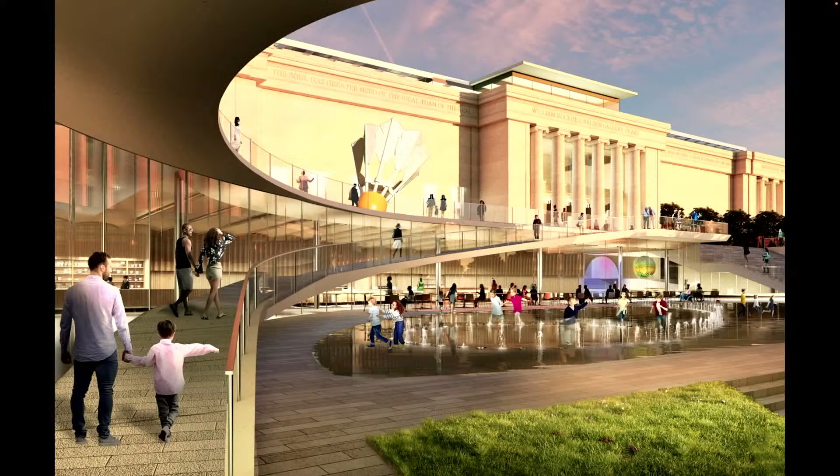Currently, the education programs tend to be in some of the lower level spaces that don't get natural light. So this idea of being able to not only have natural light be part of it, but have people in the park come in and say, wow, what's happening here? And again, making things accessible.

There's a lot of topography, and there should be a sense of inevitable movement, like we talked about at the Brooklyn Botanic Garden, so that this multi-level experience gives you a sense of how you can navigate to it. You can start to see then that navigation could allow things like the restaurant and the upper terrace to be co-located.

So just as we talked about at Longwood, carving through the retaining wall, this similarly suggests that we could carve through the retaining wall that faces the garden and open up a new relationship with the garden.

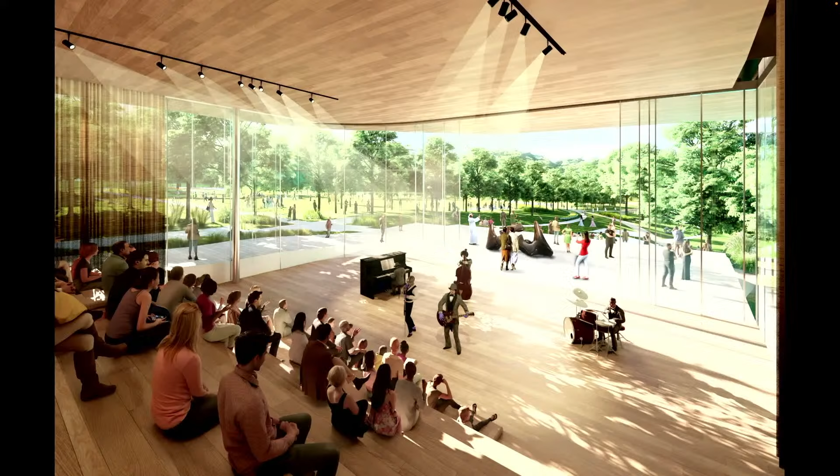And yet the idea of recognizing that performance, education, art, and events have sometimes the most extroverted opportunity as they can here—and Kansas City, of course, is as noted for music as Austin, Texas—we thought this would be a fantastic way to make that connection between the sculpture garden and the events happening here, to be fully woven together. But this is not to ignore what is truly the front entry and arrival.

What has been inaccessible with stairs meant you couldn't quite get to the main museum entry, so all the entries were taken through the Bloch addition because those were the only ones accessible. What we've done is elevate the roadway and actually bring the steps closer to the beautiful artwork here, the Maria piece, which allows both to happen. And I might add, what had been a fully opaque stone wall has, as you saw from the inside, had selective stone removed so that transparency of welcome can be signaled both inside and outside.

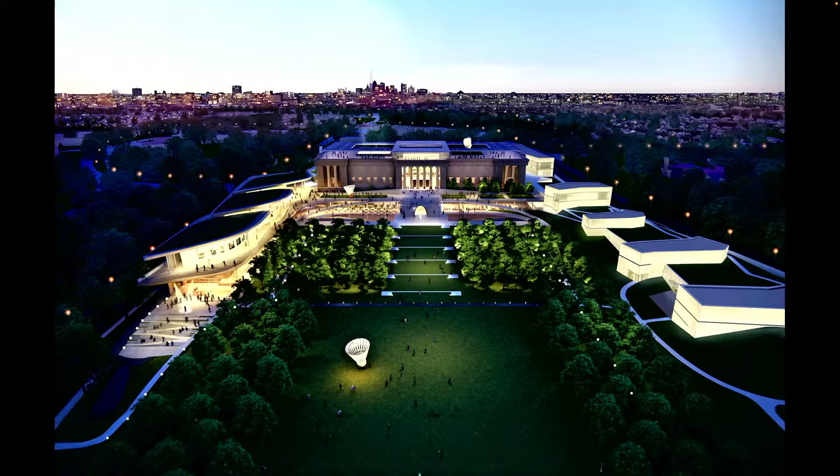This is really suggesting that this is everything all at once. It's a cultural act, it's an urban act, it's a welcome and a transparency to say the community can come here, but it's also part of being a landmark in the city that has a chance to evolve and grow.

Now, I'll tell you something the competition did, which was absolute torture. They said, just do a 2-minute film that says everything about this project. Easier said than done. So we'll end and conclude with how we were able to try to summarize everything that mattered in 120 seconds.

The music is Kansas City. It's a great music tradition.